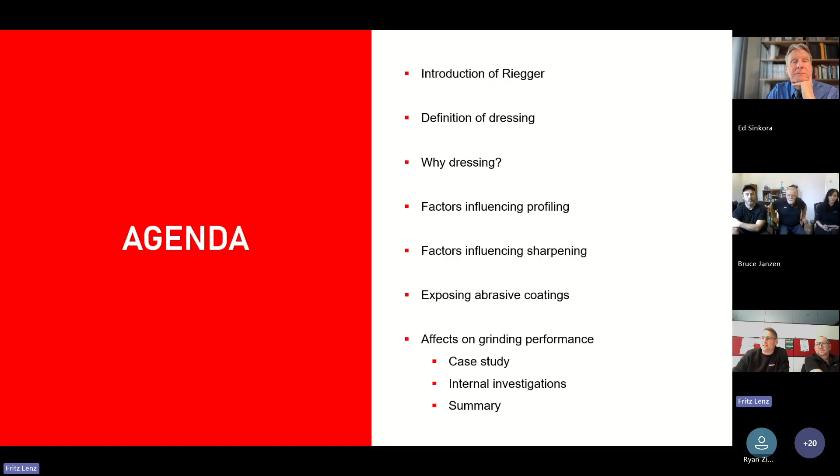Following our agenda for the next hour: first a small introduction of our company, Riegger, definition of dressing, why we have to dress, factors influencing profiling, factors influencing sharpening, exposing abrasive coatings, and lastly effects on grinding performance.

So we come to the company introduction. We are Riegger, now in the third generation. Our CEO is Konstantin Riegger. We were founded in 1967 by Wolfgang Riegger, his granddad. We have 60 employees. Our headquarter and main production is in south of Germany, in Affalterbach, close to Stuttgart, and we have a second small plant in Romania. We are focused and specialized in the production of diamond and CBN grinding tools, especially grinding wheels.

Our main fields of focus are tool manufacturing, like most of you, I guess, also machinery and plant engineering and contract manufacturing. We see ourselves as a partner, a technology partner, of our customers.

So we offer trainings and workshops here, or we also visit some of our customers to do workshops directly there. And we offer workshops over 2.5 days with several partners. Also part of our cooperation with our customers, we can offer application engineering and also a dressing service.

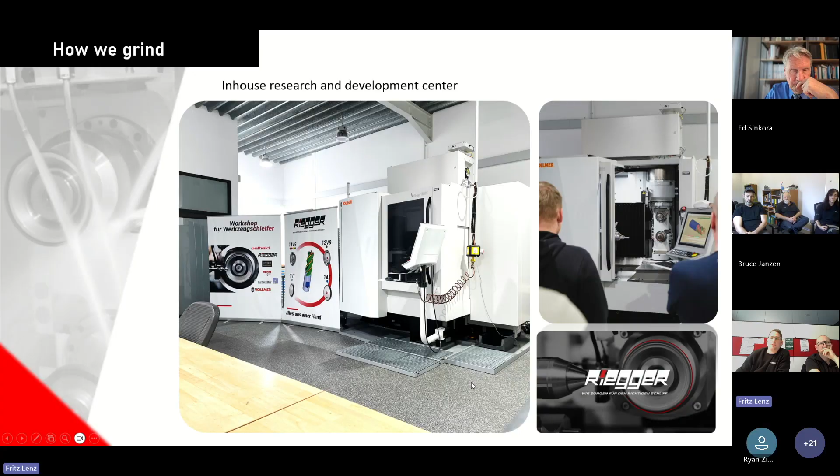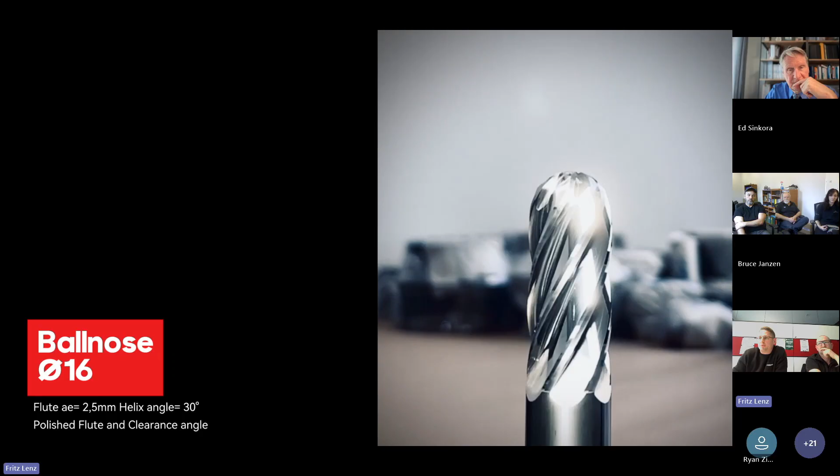Here, a quick example of what we grind - nothing new for you, I guess. Here, for example, just a ball nose cutter, diameter 16. That's our old standard fluting wheel, scope grind RMP3.

Now, brand new, developed in the last year, a new solution for fluting. As well for the flute, we have a scope grind finish to polish the flute at the end with a mirror shining surface quality.

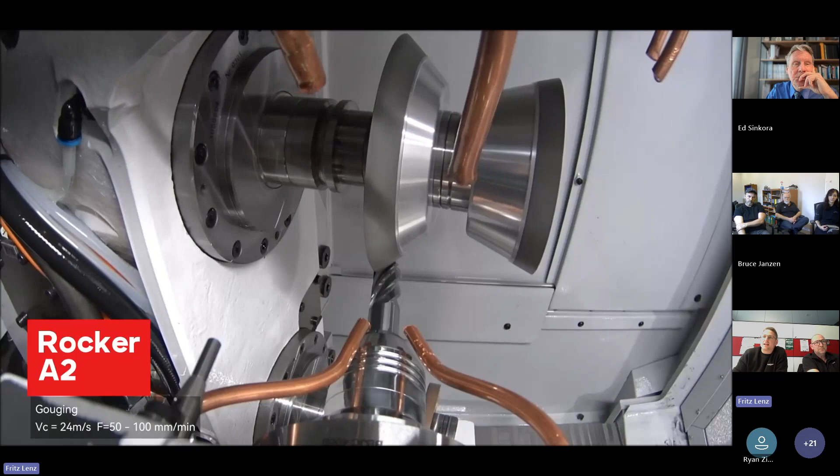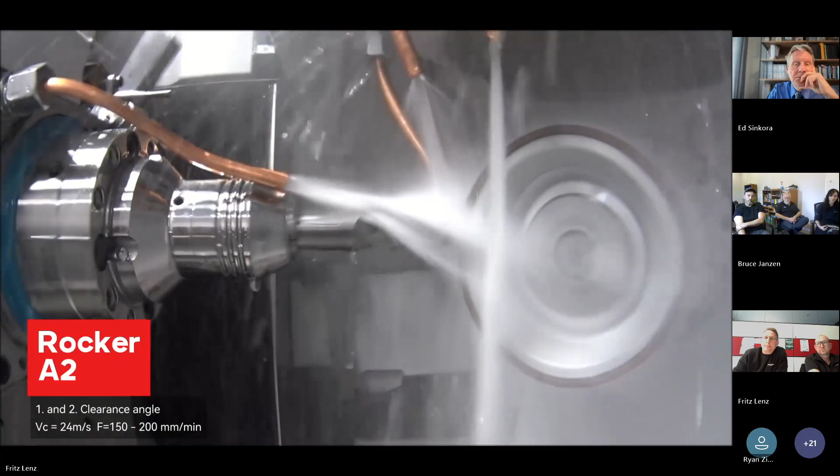And also for the cup wheels, we have some solutions - that's our solid solution for clearance angles, ODs and stuff like that. Also for gashing, that's the Rocker A2, a hybrid bond.

Also for the radius and face grinding, that's a good solution. And also for these geometry elements, we can use the scope grind finish for polishing these elements.

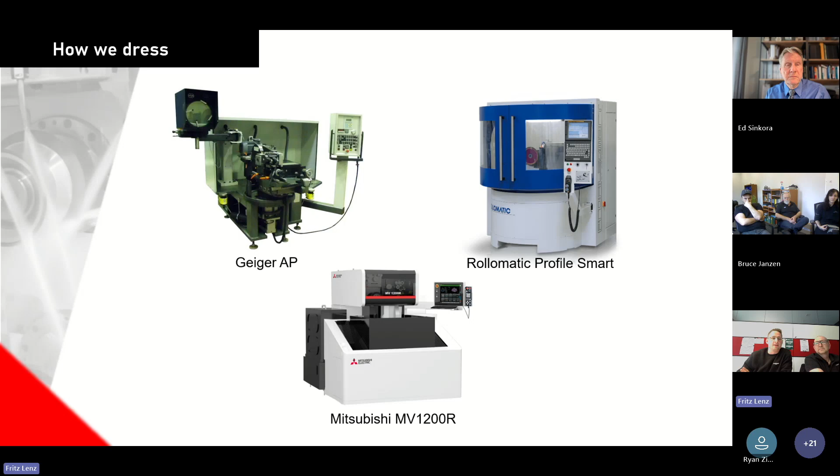So we come to the main topic for today: how we dress in our company. We have several opportunities and machines in our company. We have several Geiger APs, a manufacturer for dressing machines from Germany - real strong steel tanks, conventional dressing machines. Also we have Rollomatic Profile Smart, a CNC machine for dressing, and last but not least, we have the Mitsubishi MV1200R, so we have the possibility to dress via wire cutting. But today we focus on the conventional way of dressing.

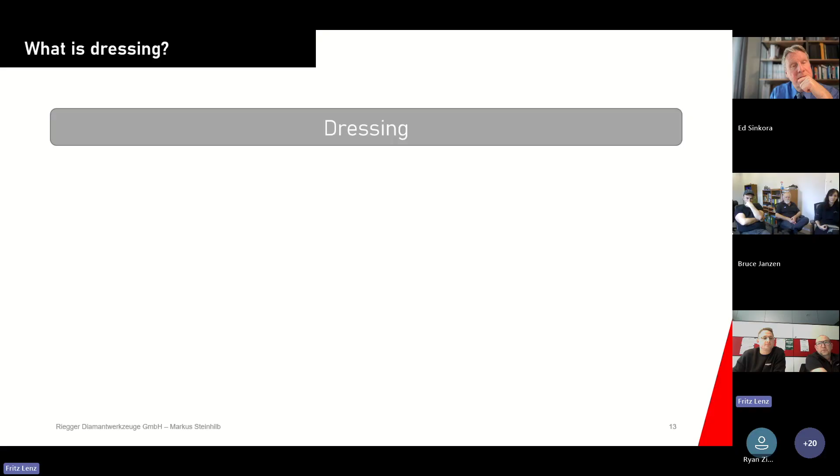Okay, hello and welcome from my side as well. Let's start with the actual topic: what is dressing? Dressing involves two work steps. The first one is profiling, the second one is sharpening.

This together is called dressing. During profiling, our goal is to change the geometry of the grinding wheel. We aim to establish the macro geometry and to improve radial runout and axial runout, and we can balance the grinding wheel a little bit by profiling.

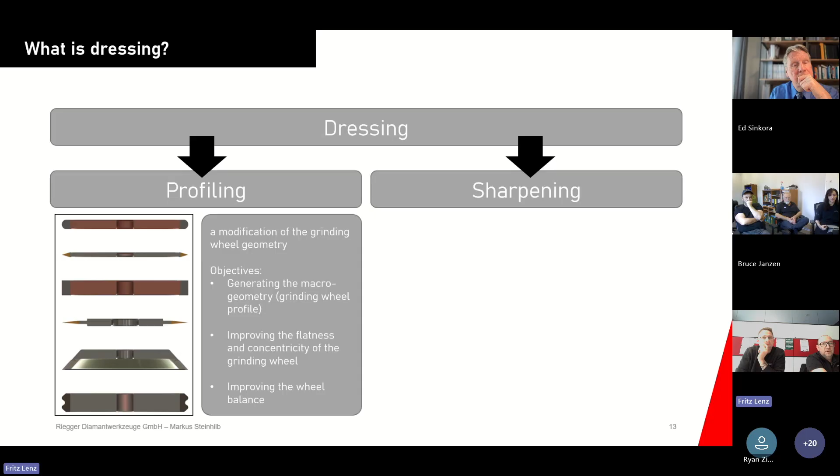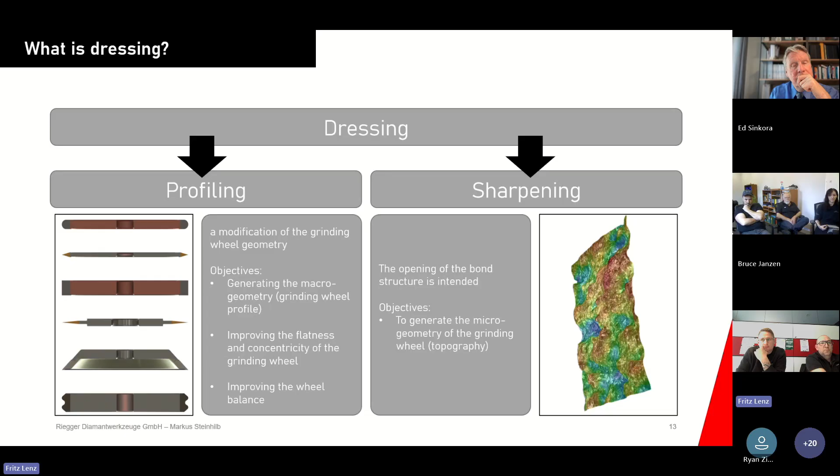In the sharpening step, the macro geometry remains unchanged. At this stage, the focus is exclusively on creating the micro topography - we just want to generate the tips of the diamonds outside the bond.

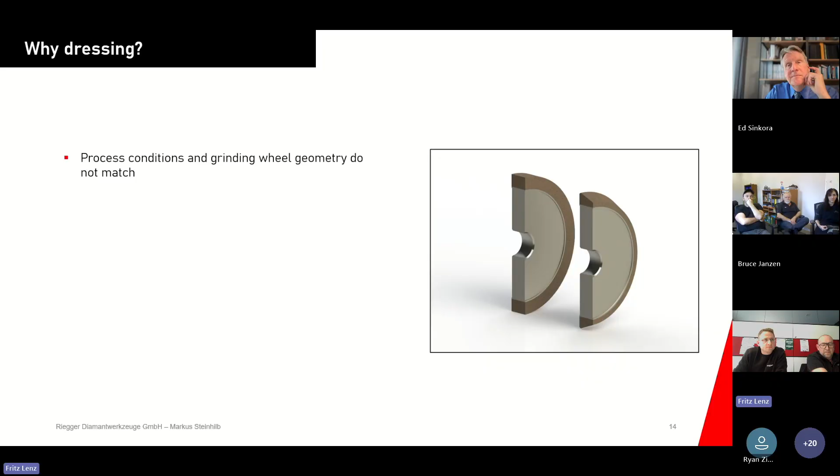Let's take a look at why we have to dress. The first reason is the process conditions and grinding wheel geometry does not match - like we need another shape or form of the grinding wheel, and you got it from your grinding wheel distributor as a wrong form. The concentricity and flatness accuracy are insufficient, or we have an imbalance at the grinding wheel.

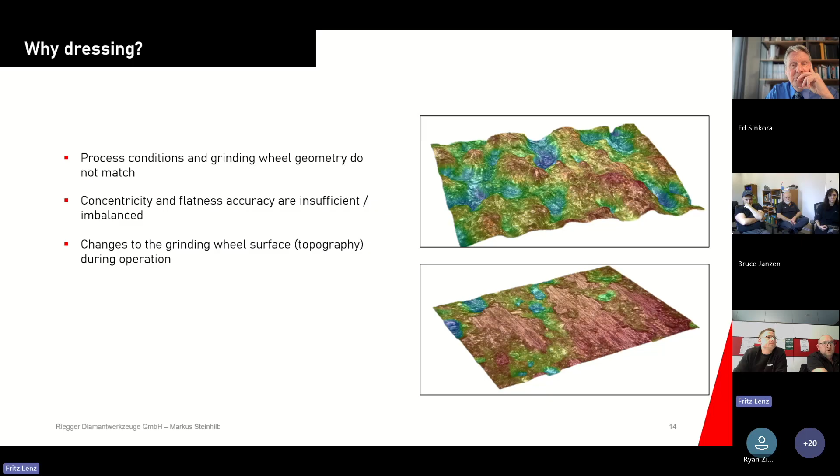We had changes at the grinding wheel surface, at the grinding wheel topography during the operation. We had a loss of form or a big wheel wear during the operation, or the grinding forces increase significantly.

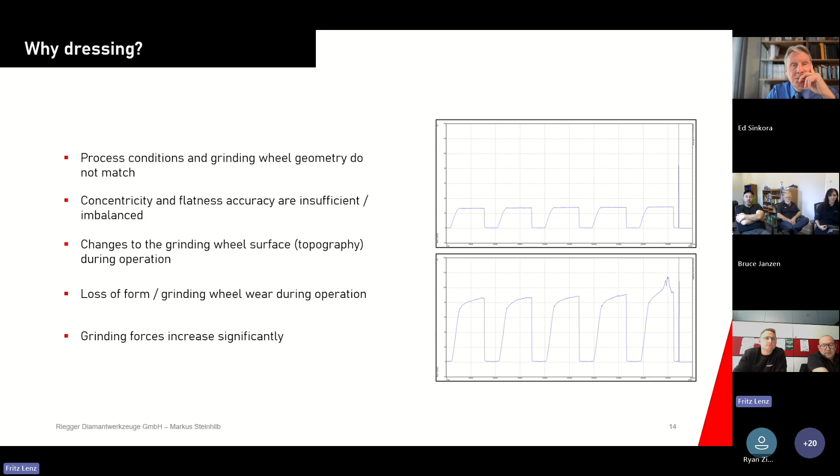Or redressed. The types of grinding wheel profiling.

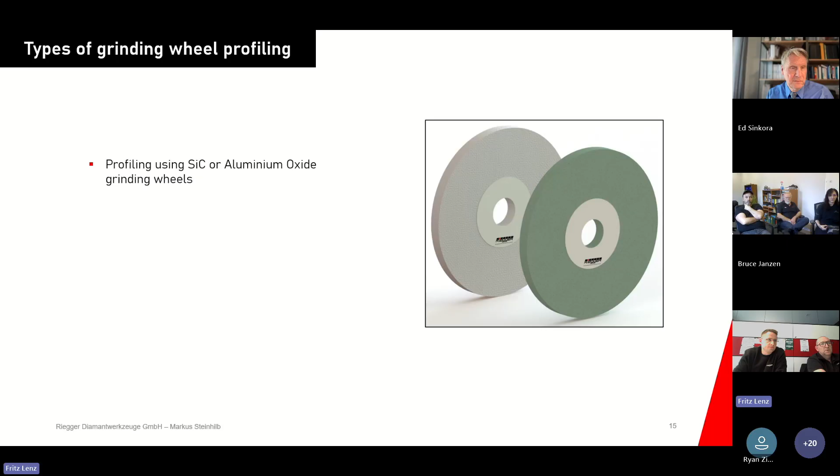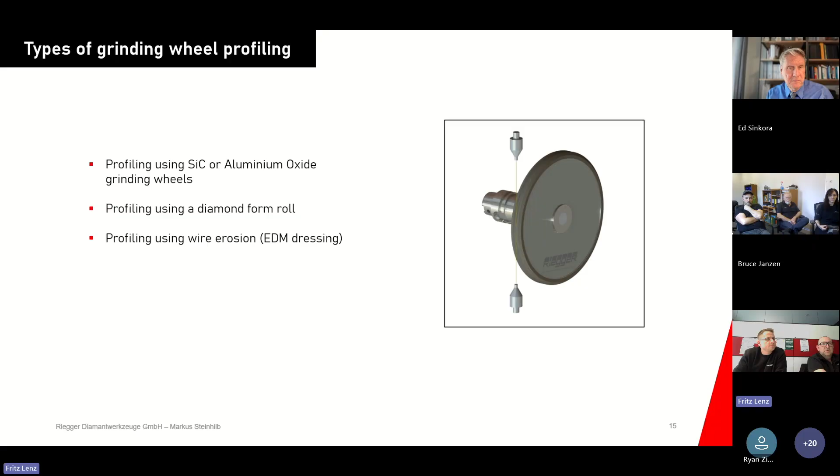Here I show you the most common dressing methods: profiling by using carborundum or aluminum oxide grinding wheels. We can profile by using a diamond form roll, by using wire erosion (EDM dressing), or with an electroplated form roll.

Now let's get into factors influencing profiling. First up, we've got the parameters. Are we dressing synchronous or asynchronous, clockwise or anti-clockwise? What cutting speed, feed rate, or depth of cut are we adjusting?

Next point is the in-feed strategy. Are we feeding in or outside the grinding layer? And another point is the cooling system.

So we can switch to the last point of this page: the specification of the grinding and dressing wheel. As I said, if I use corundum or silicium carbide, what grit size, hardness, or bonding system are we going with?

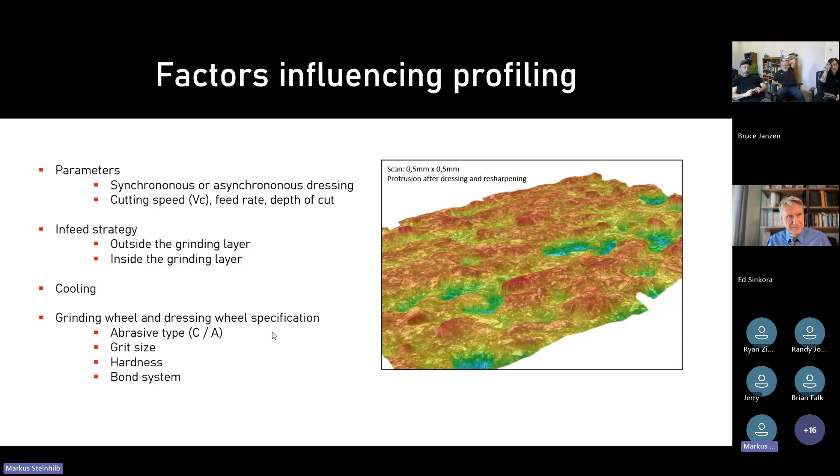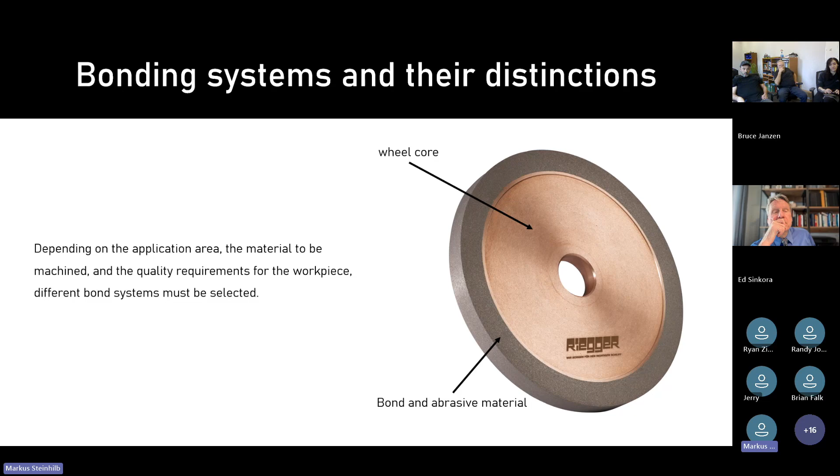A super-abrasive grinding wheel is composed of three fundamental elements: the base body, the bonding system, and the abrasive material like CBN or diamond. The selection in each case depends on factors such as the material to be machined and the specific grinding operation. The bond holds the abrasive grains as long as possible, but it must also wear so that new cutting edges are formed. The bonding system also influences how easy it is to dress the grinding wheel.

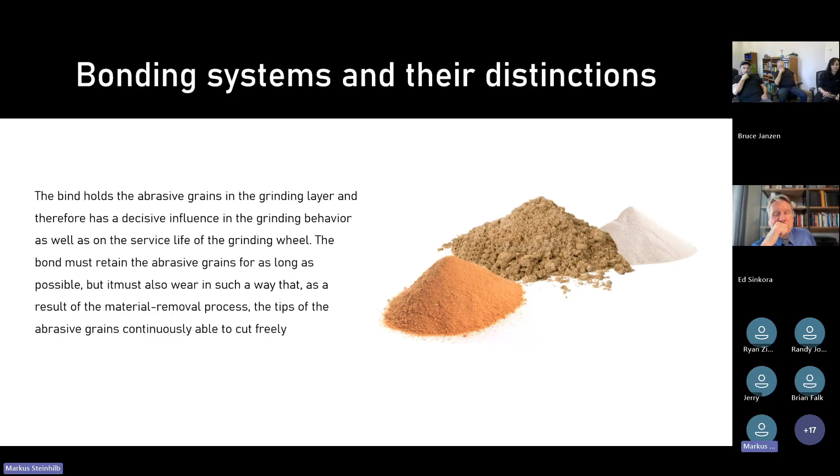Now let's move on to comparison of the bonding systems. Here we look at the different characteristics, mainly focusing on dressability. First, resin bonds. Resin bonds have a high removal rate, good cutting ability, and provide mostly smooth, cool grinding, but come with high wear. Classic resin bonds are mostly soft with good cutting performance and easy to dress.

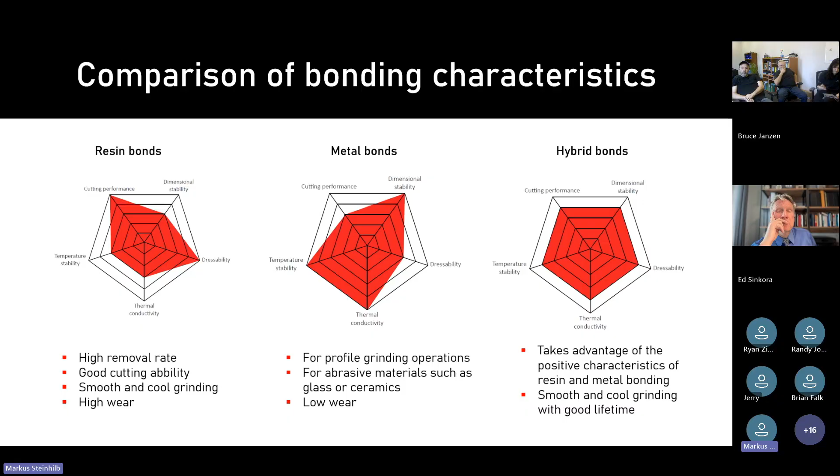On the other hand, we've got metal bonds with high hardness, good dimensional and temperature stability, and great thermal conductivity. These bonds are typically used for profile grinding operations and for abrasive materials such as glass or ceramics. Lastly, we've got hybrid bonds, which combine the advantages of both, giving smooth and cool grinding with good lifetime.

One important thing to add here is that each bond type can also be influenced in its properties by additional parameters such as fillers, pore formers, pressing force, and pressing temperature. Each individual parameter affects the wear behavior and grinding performance of the grinding wheel, which is why individual bonds can deviate from the characteristics listed before.

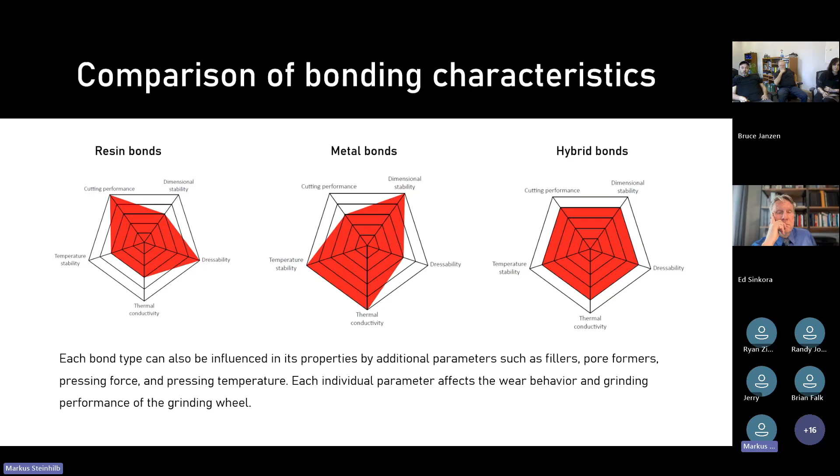Here we have a designation of a typical dressing wheel that we use at Riegger: C120 J7V36 S63. We will go through it character by character.

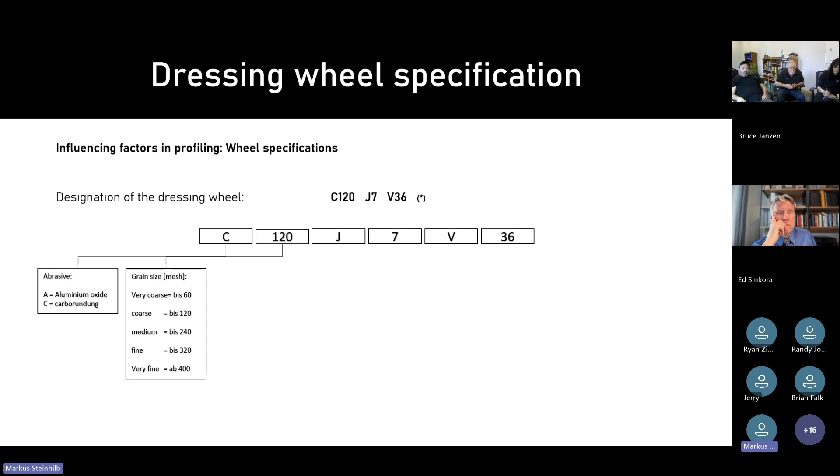The letters A or C mean that aluminium oxide or carborundum is being used at the dressing wheel. The number 120 is the grain size, from 60 (very coarse) to 400 and more (very fine). The letter J is the hardness of the bond, going from A to Z, extreme soft to extremely hard.

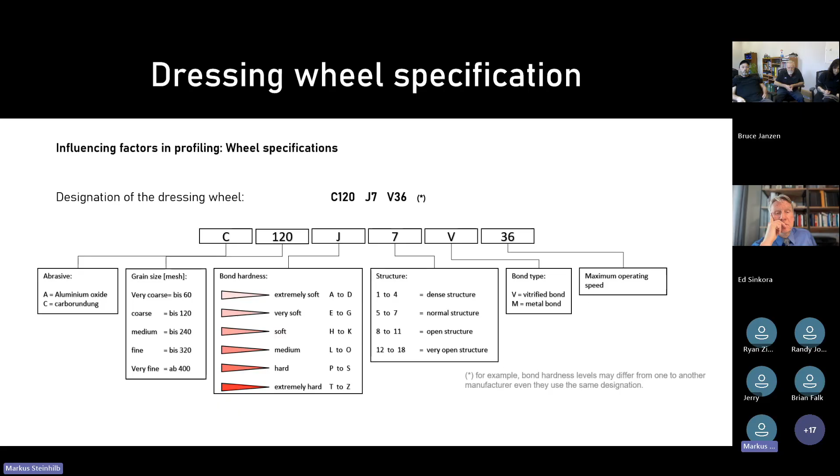The next number describes the bond structure, from 1 (very dense) to 18 (very open). And the last letter and number describe the type of the bond and the maximum operation speed.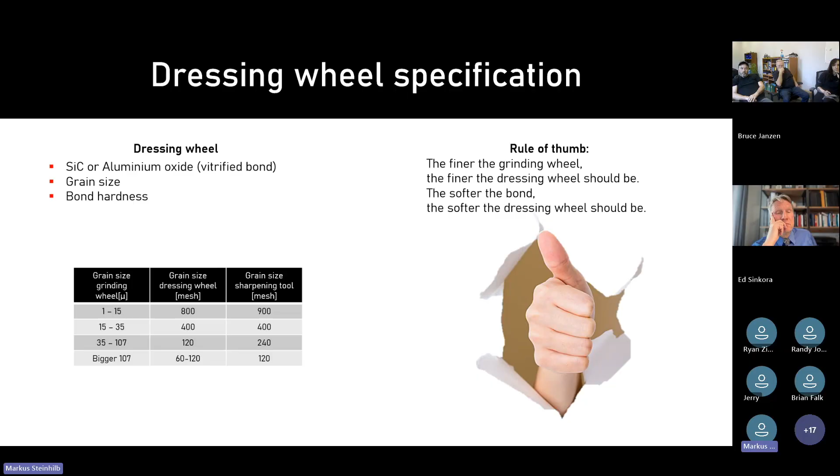Also, the rotational direction affects the performance of profiling. By choosing a synchronous direction, the effective cutting force is significantly higher, and so we achieve a sharp grinding wheel, a rougher workpiece surface, and low grinding forces.

By turning around the rotational direction into asynchronous, we generate a smoother grinding wheel, a finer workpiece surface, and higher grinding forces.

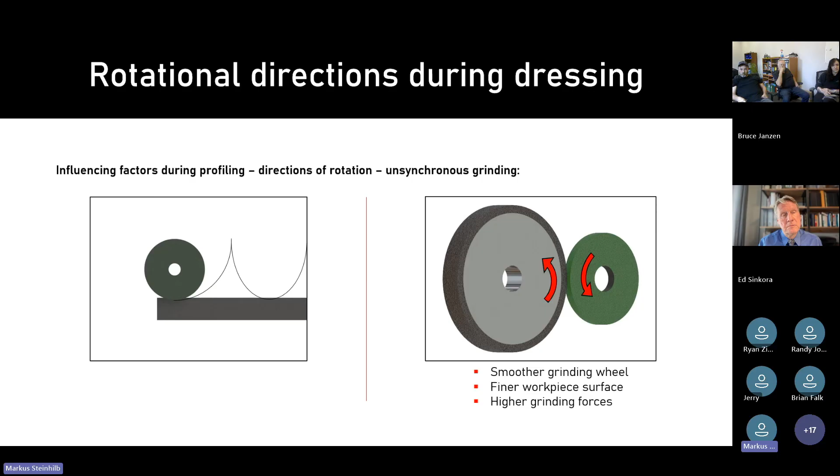Another point is the parameters of the wheels: the chosen cutting speed and the selected RPM. At Riegger, we always recommend paying attention to the rotational speeds and suggest a speed ratio of 1:3.

So the dressing wheel should always run 3 times faster than the grinding wheel. For example, when you choose 500 RPM for the grinding wheel, you have to adjust to 1500 RPM for the dressing wheel.

If this ratio cannot be achieved, because it's not possible from a machine standpoint or something like that, the diamond or CBN grinding wheel must always run significantly slower.

Another point: to prevent the spindles from starting to swing up or vibrate, please don't choose even speeds.

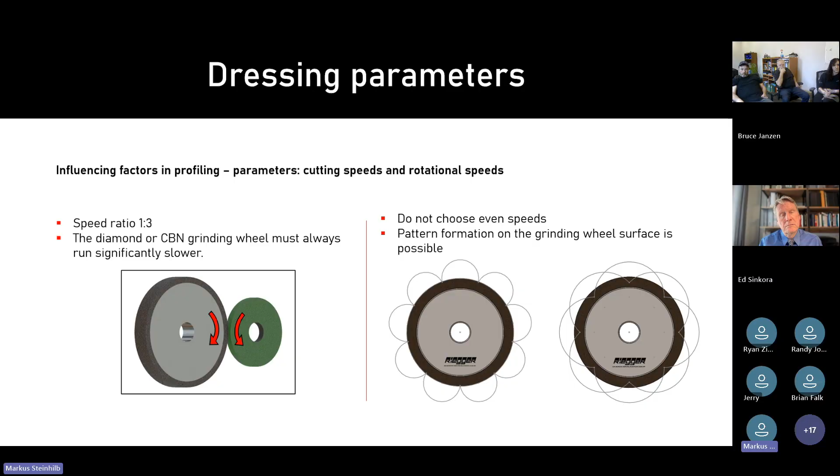What about the cross feed and the in-feed? The cross feed depends on different factors, such as the width of the grinding wheel and the geometry being dressed. For example, when dressing manually, a lower cross feed is used for radius to avoid creating facets. Typically, the cross feed rate is around 700 to 1000 millimeters per minute for straight areas and 400 to 700 millimeters for radius.

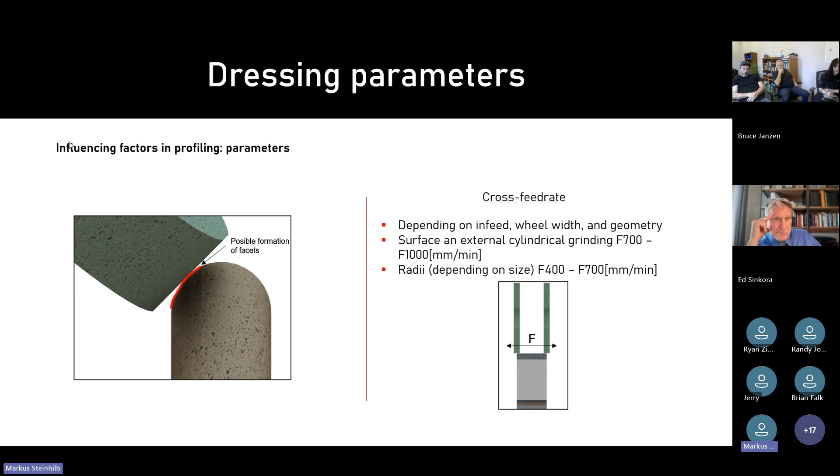The in-feed strategy shows that less wear and sharper grinding wheel edges are achieved when the in-feed is made within the grinding layer. If the in-feed is applied outside, chips can occur and the wheel can become convex. You see it here on the right side of the foil. The wider the grinding wheel, the stronger the effect.

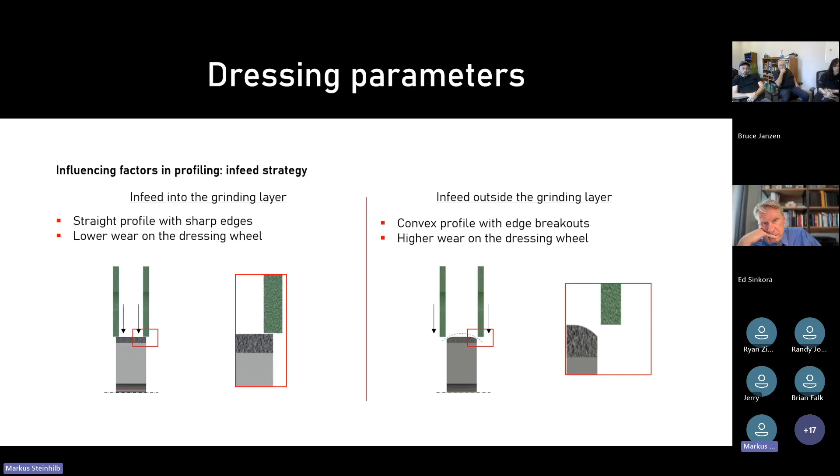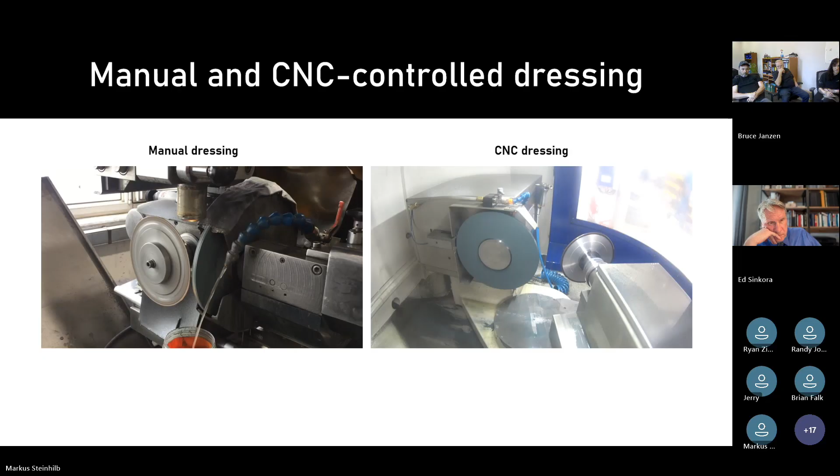Important for that is different geometries may require different strategies. In the following videos, there are some examples of the dressing process as we do it at Riegger.

Here you can focus on the cooling, and here you see how we cool in an indirect way. Here you see the work of our CNC dressing machine from Rollomatic, the Profile Smart.

On the CNC machine, you see also that the dressing wheel never leaves the dressed wheel, the grinding wheel. We are every time in touch with the grinding wheel.

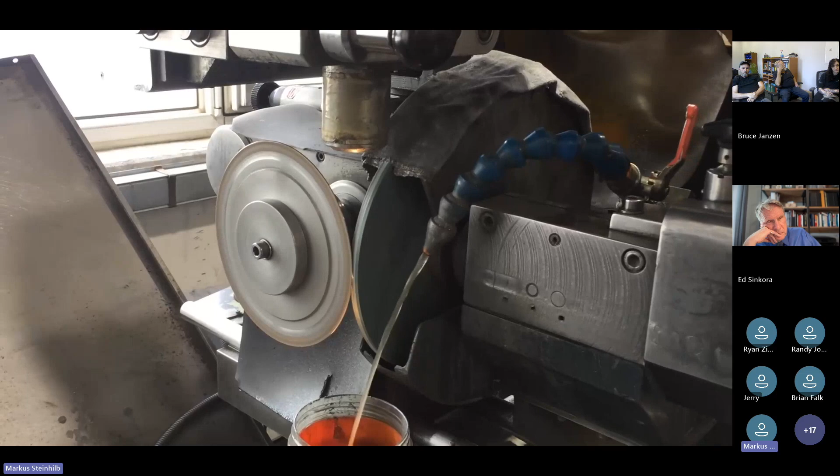Now I have a look at the manual, conventional Geiger machine. And here you see the cooling as well. So we don't go with full pressure in the dressing process. We do it also in an indirect way.

The next one is the dressing video from our 5-axis tool grinding machine, the Vollmer 360S. That's an example of how you can dress properly on this CNC grinding machine.

Let's take a look at the sharpening process. There are normally two types of sharpening: we can sharpen manually or by machine. The advantages of machine sharpening are a constant force to the grinding wheel, a constant infeed to the grinding wheel, and this leads to a consistent result. Manual sharpening, on the other hand, is strongly influenced by the individual operator, the individual guy in front of the machine.

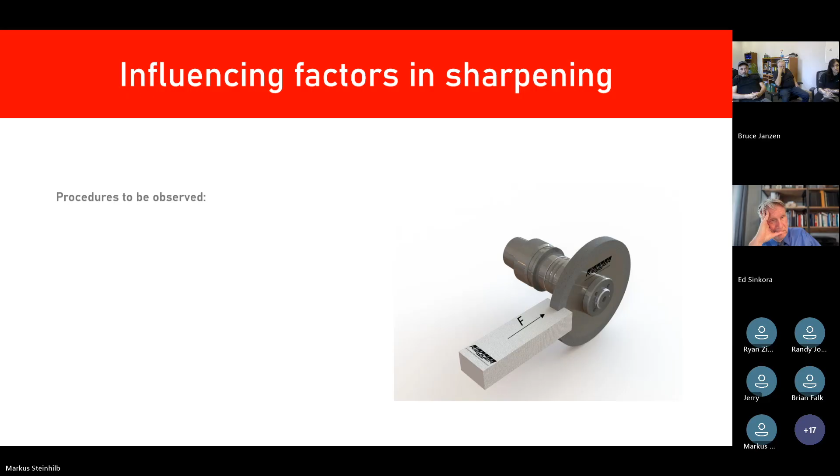But no matter if the grinding wheel is sharpened by a machine or by hand, we have to look at what is important. The direction of rotation during grinding must correspond with the direction of rotation during the sharpening. The sharpening stone should be soaked in oil or emulsion to get, by the sharpening process, a slurry during sharpening. Once the final depth has been reached, a short dwell time should be applied to allow the grinding slurry to take effect.

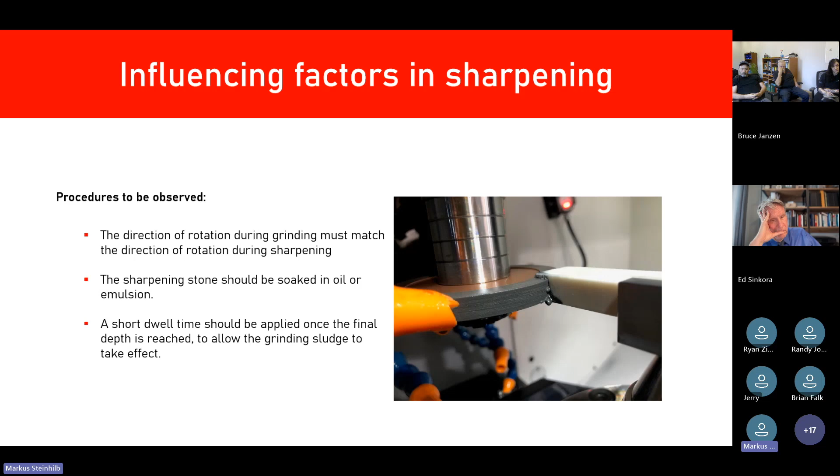Here you see a bigger picture about the slurry. What I mean by this slurry is the diamond powder mixed with a little bit of the bond, and a little bit of the corundum or the aluminium oxide, and this is a very important thing for sharpening.

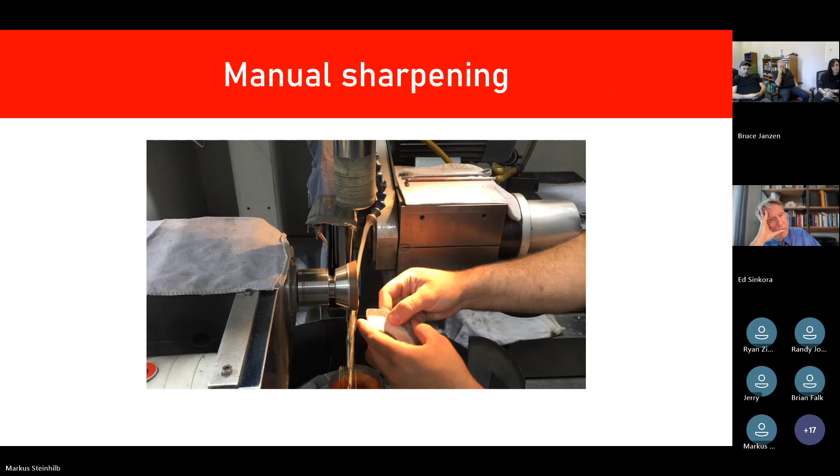We also have two videos for the sharpening. The first one shows the manual sharpening, and here you see it's just done by hand, on each side with different forces in different directions and so on.

Another important topic is exposing grinding wheel surfaces, which means turning back the body material so the abrasive layer can be used again.

On the following page, we see some negative examples. On the left side, the broken, manually exposed one, and on the right side, this customer turned too deeply, so there was no contact area anymore, and the grinding rim broke out.

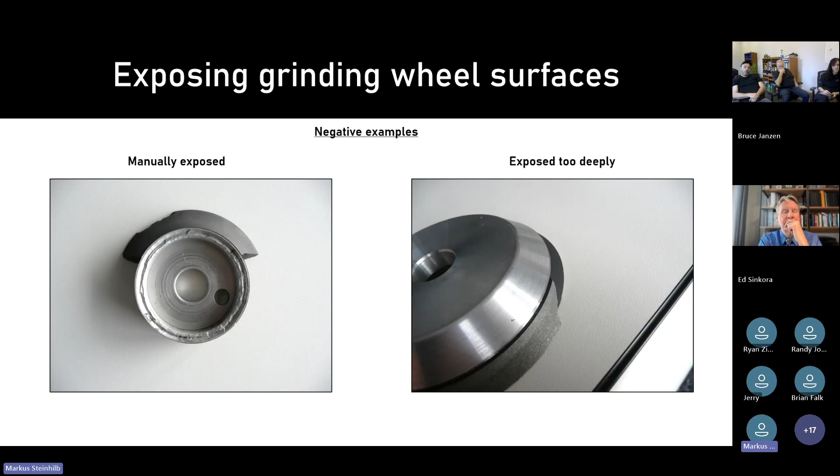That brings us to the initial question: when should a grinding wheel surface be exposed? When the abrasive layer and the core body have reached the same height, like here in the picture, or when the body material interferes with the grinding path.

So next question is, how should a grinding wheel surface be exposed? The most important thing is to use proper machines and tools, not by hand, ideally on a lathe with a suitable turning tool. And another important thing is, if this isn't done on the adapter, the wheel should be balanced again.

Next question is, how much should a grinding wheel surface be exposed? In summary, as little as possible, because sometimes the body additionally serves to provide support and absorb forces during the grinding process. But always pay attention that the abrasive layer is never touched under any circumstances, because even small micro cracks on the rim or on the bonding can cause damage and a breakage of the layer or the rim from the grinding wheel.

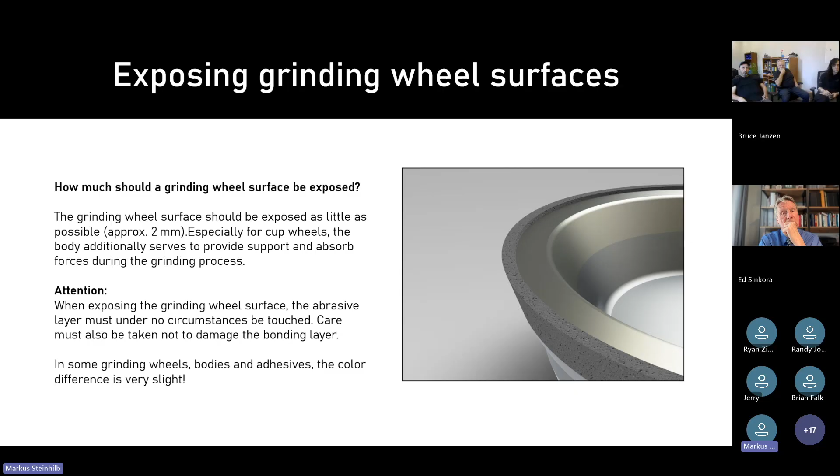See how our dressing process is affected. We carried out several tests that we would like to present to you. We have done 4 tests. The first test is a correctly dressed grinding wheel with sharpening. The second test is a correctly dressed grinding wheel without the sharpening. Then we had an incorrect dress. We used a much harder dressing wheel for this dressing process, but we sharpened it. And test 4 is incorrectly dressed without sharpening.

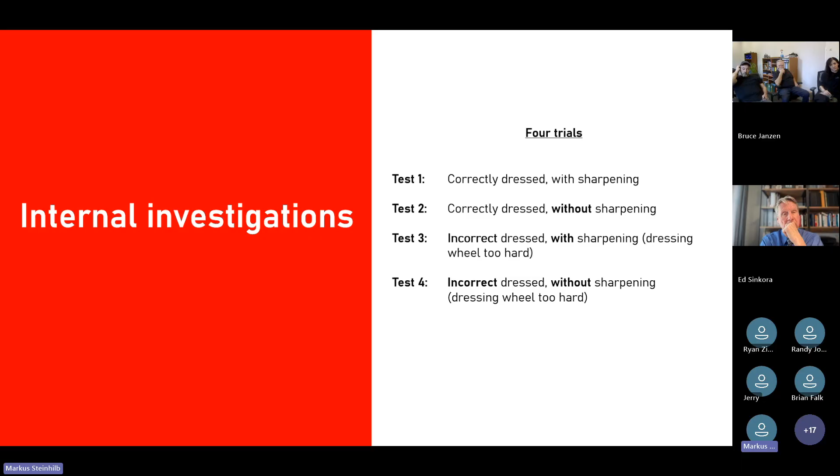The procedure was always the same. Only the dressing and the sharpening were different in these tests. We always used the same grinding wheel and ran the same parameters. The grinding wheel was a 1A1 with a diameter of 100 millimeters, a width of 10 millimeters, and a grit size of D54 in the RMP3 bond. We set a depth of 4.5 millimeters and ground with a feed rate of 100 millimeters per minute. Using these parameters, 5 grooves were ground into each carbide blank with a diameter of 12.

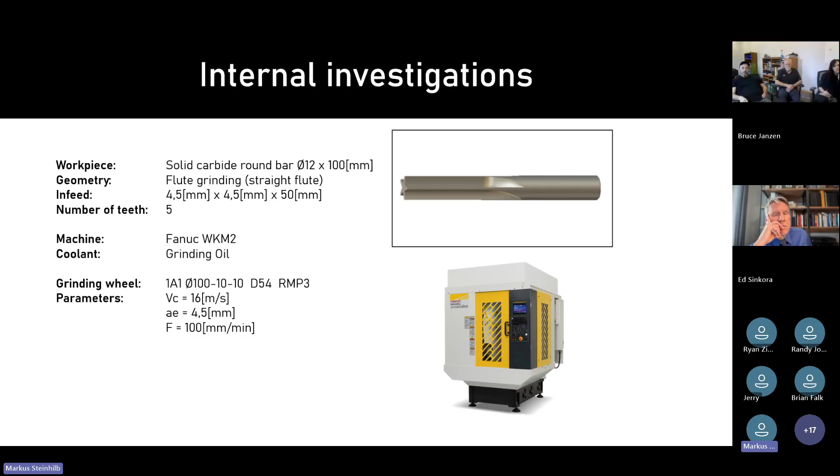So we follow the first trial, test 1, properly dressed, how it should be. We use the machine you saw in the videos before, the machine from Rollomatic, the Profile Smart. We choose the correct wheel: silicon carbide, grit size 120, porosity and hardness J7, vitrified. We choose the dressing wheel speed 1500 RPM. As I said before, we don't choose this value, but just for notification reasons, we note it down like that. And we choose the grinding wheel speed of 500 RPM.

We choose the cutting depth per pass of 0.07 millimeters. The rotational direction we chose was synchronous. Our cooling, as you saw before, was emulsion. Also, at the end, we sharpened by hand with a corundum stone with a grit size of 240. We choose the same speed of the grinding wheel, 500 RPM. Because it was by hand, the cutting depth was approximately 5 millimeters. Here we choose both rotational directions, synchronous and asynchronous, to make it really sharp.

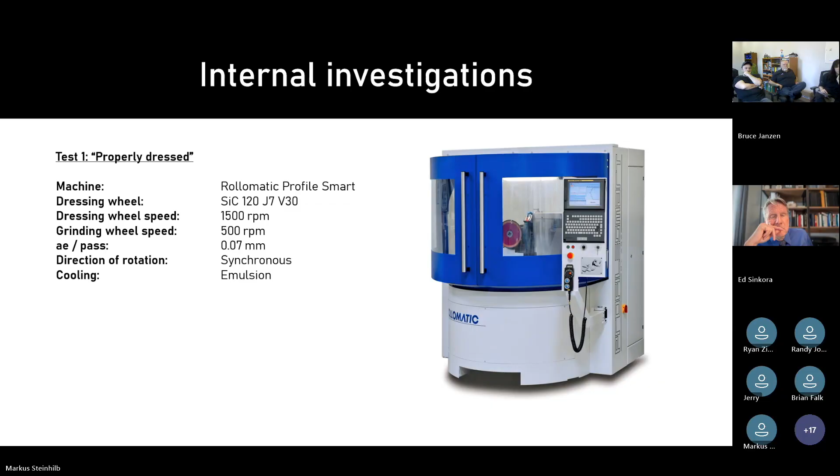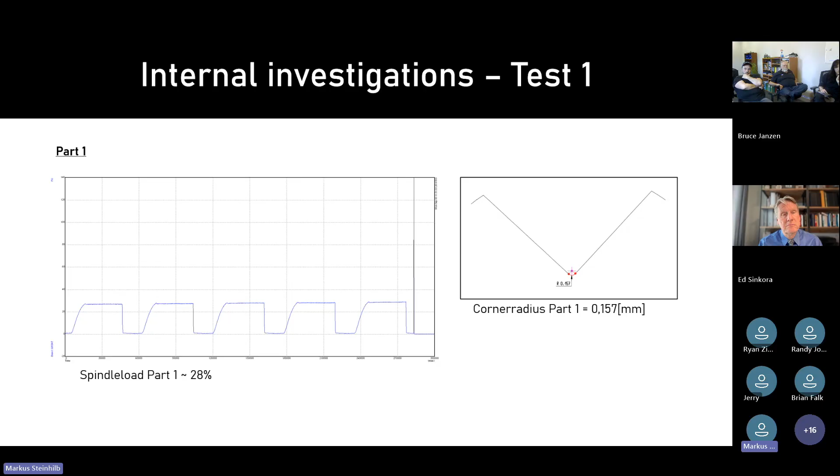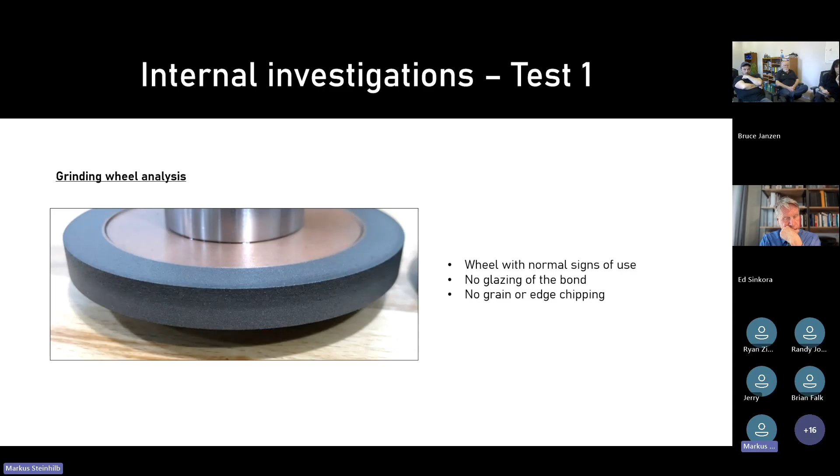At part 1, as you can see, the spindle load was very consistent, very moderate, and relatively low. The value was 28%, which is very good for this application on this machine. After 20 parts, we still have a very consistent spindle load, very moderate, but increased by 20% to 48%. After that, we took a look at the grinding wheel, and as you can see, we see some normal signs of use, no glazing of the bond, and no grain or edge chipping, no damage. So everything is normal and in good condition.

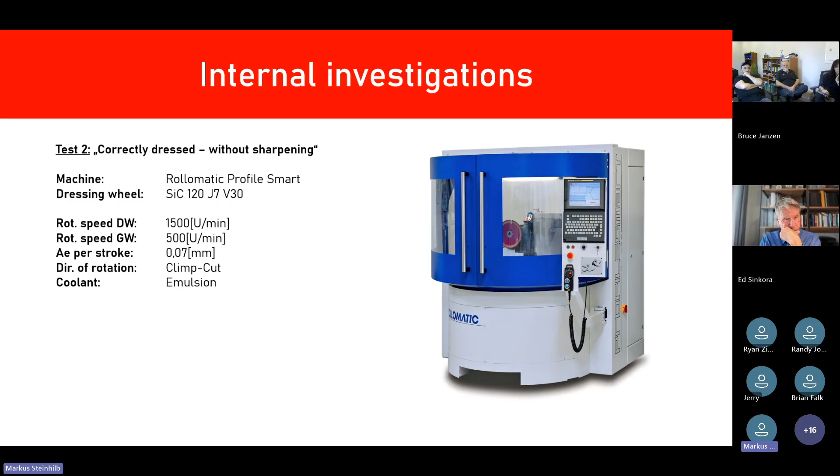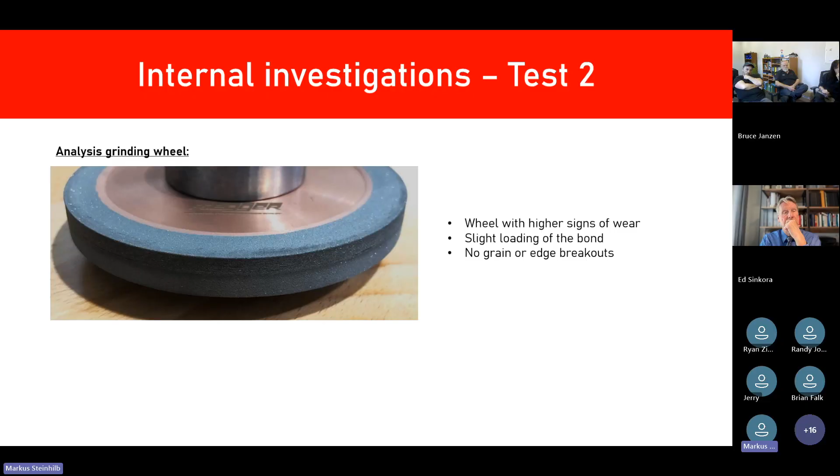The next experiment, the third test, was dressed incorrectly, with the wrong wheel selection. Here we used the same machine, same parameters, but a different dressing wheel specification. We chose silicon carbide with grit 180 and hardness and porosity of O9. And again, also hand sharpened as before in a proper way.

I'm sorry, Markus, refresh my memory. Why is that the wrong dressing wheel? That's just the wrong dressing wheel for the grinding wheel we used. We never can say. No, I understand that. I'm sure some of my colleagues have my elderly memory here. I'm forgetting what the parameters of the wheel were that would make this an inappropriate dressing wheel.

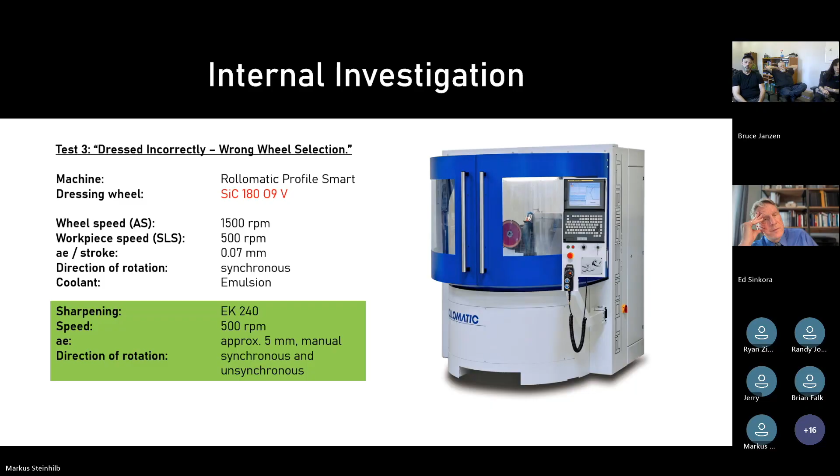It was a hybrid bond with D54. And for this we did trials, and the proper one was the silicon carbide one with grit size 120 J7. Right now we did the same trial with grit size 180 and O9. And then we analyzed the spindle power and the influences on this process.

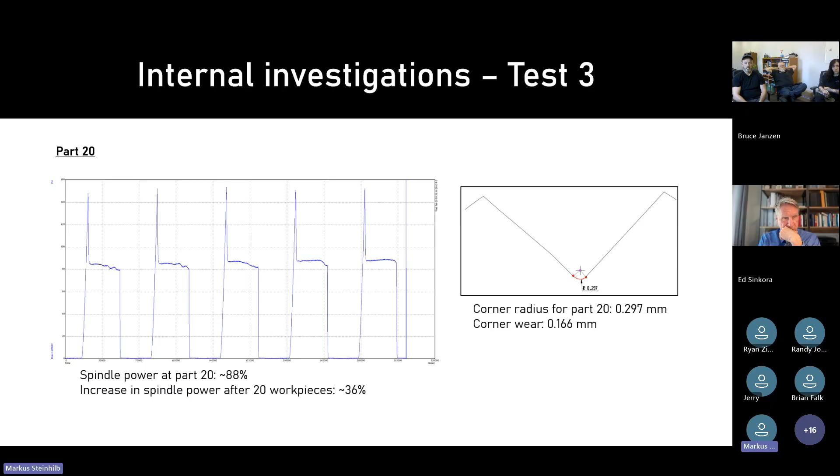Here you can see it at part 1. We started with a stable spindle load, but we started at 52%. But the graph you see is already uneven and not really consistent. And the real effect you see after 20 parts. After 20 parts, we have reached a high, inconsistent spindle load of 88%. Especially when we hit the workpiece at the beginning, the spindle load rises extremely, and we reached a very high peak.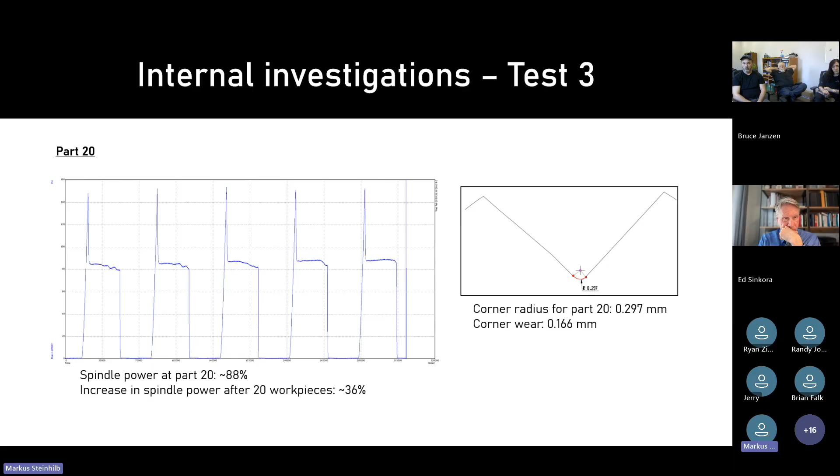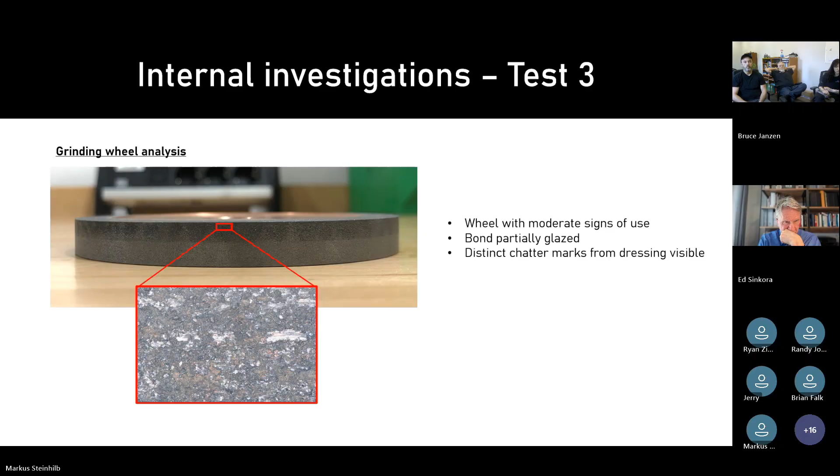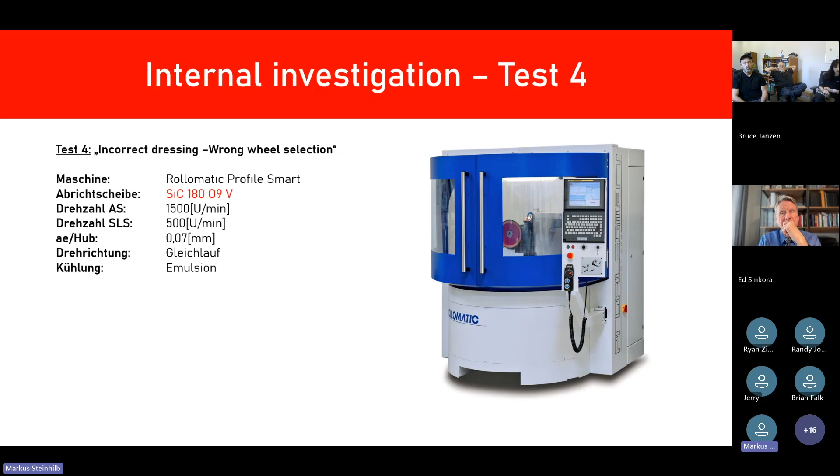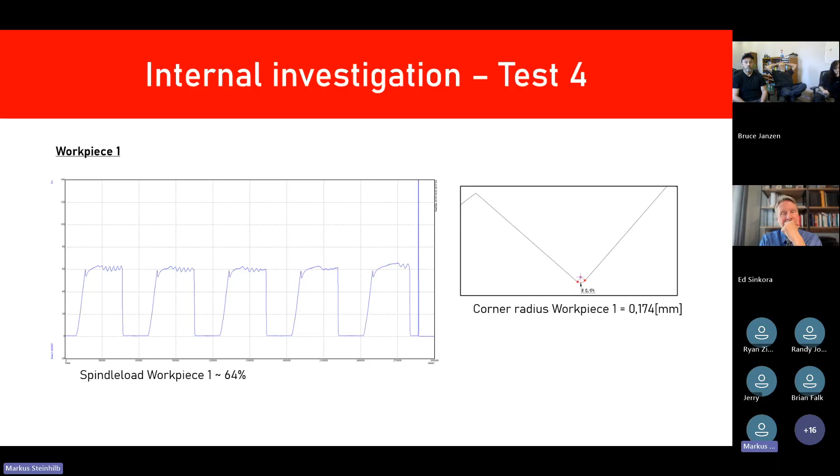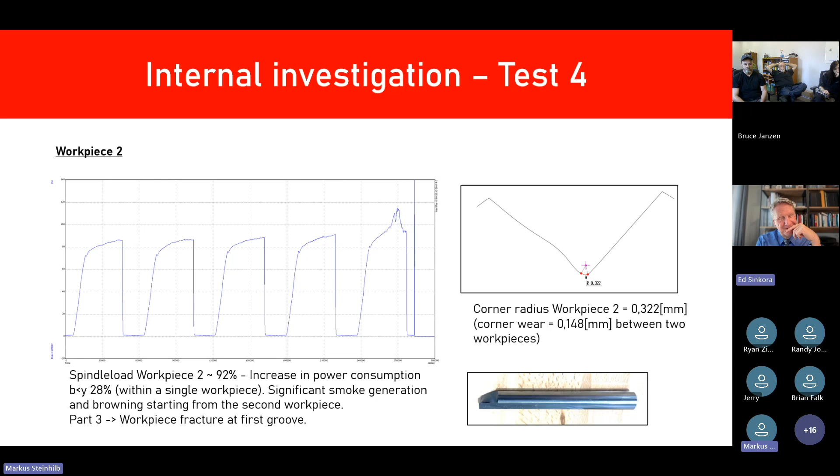The last test we did was set up like the third test before, but here also without the sharpening. I can say right from the start that we did not complete all 20 workpieces, because we already started at 64% spindle load on the first workpiece, and on the second workpiece, the spindle load had already reached 92%. During the third workpiece, the workpiece broke after the first groove. You see it in the picture on the right.

When we inspected the grinding wheel, we saw that it showed strong wear. The bond at the wheel edge was fully loaded and glazed, and clear edge chipping was visible. In addition, changes were seen in the outer area of the workpiece.

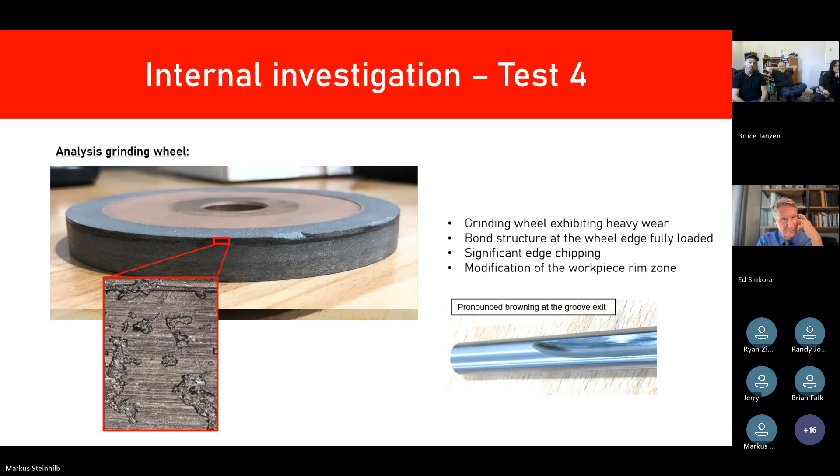So when we summarize this and compare the spindle loads, we see clear differences between the results, and we see clearly the effects. Improper dressing can cause differences in spindle load of 40% or more. Even small differences can have a big impact in terms of the spindle load, the spindle life, the wheel life, or production volume.

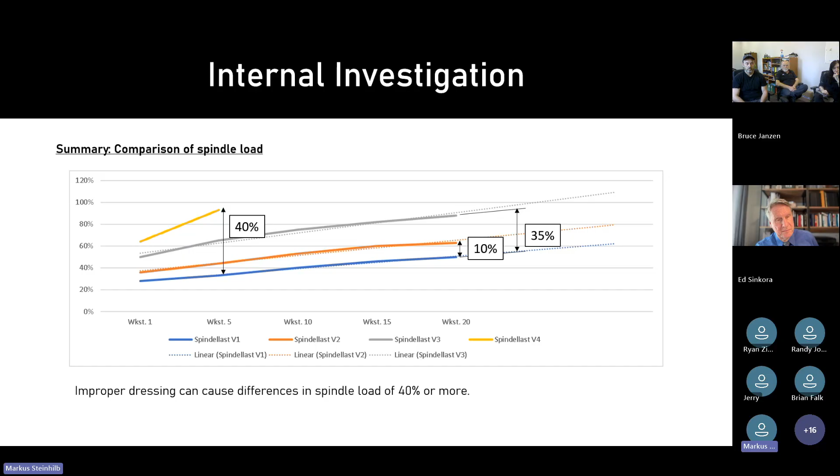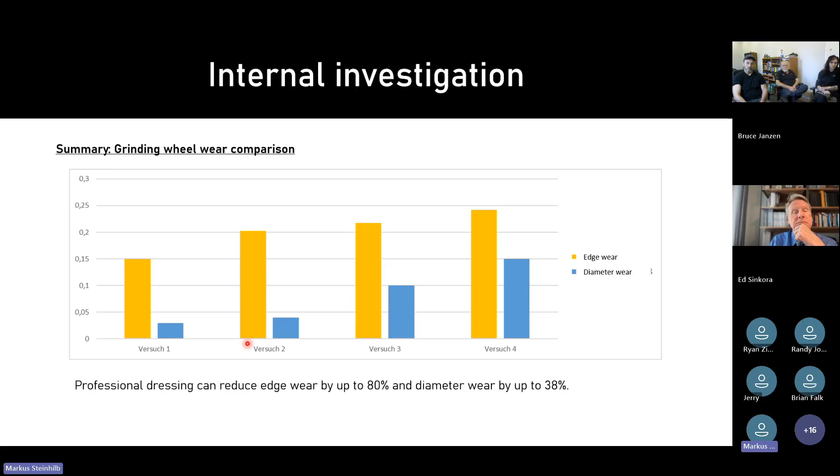So at the end, let's summarize the most important points about dressing. First, use a properly maintained dressing machine, with no worn or loose spindles or axes. Use a dressing grinding wheel matched to the grit size and bond system, and sharpening stones matched to the grit size and bond system. We have to choose the correctly selected parameters, like cutting speed, feed rate, and depth of cut.

Preferably cool with oil or emulsion, not with full pressure. We should do it like you saw in the video, in an indirect way, but it's important to cool with oil or emulsion. And at the end, we can repeat Markus' words from before: proper dressing can significantly extend the dressing interval, and workpiece quality and grinding performance are improved, while grinding wheel wear is reduced. As a result, in the end, we significantly increase productivity.

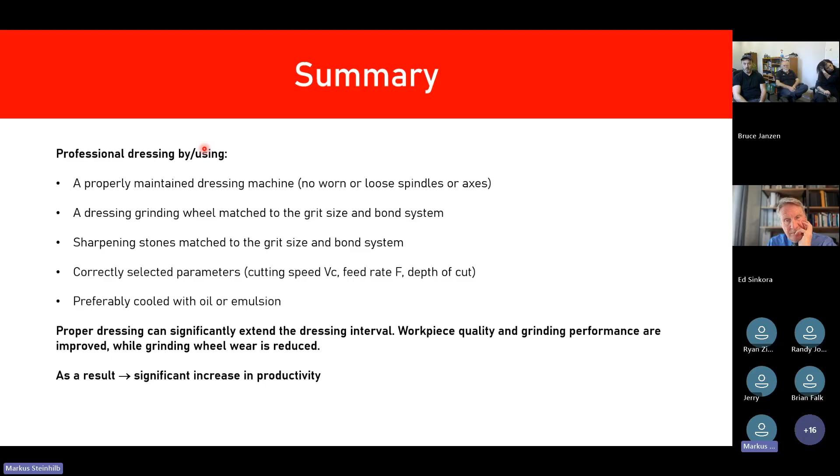So we now try to speed these things up to keep the time. And now I pass it back to Ed again.

Thanks very much, you covered a couple of key points really quickly. We've already got a couple of questions that I think are going to pull us back into some of it. You mentioned balancing quickly just a few moments ago, so how would you balance your wheels in general, or what do you recommend?

We balance it with a balancing machine. We have a special balancing machine from, maybe you know the company Haimer from Germany. Yeah, they're my competitor. I've said nothing, then it's a nice machine, another nice one. We also have the NPM. Oh, okay, maybe you know that better. That's a better answer. Okay, we have both of them.

Now, as the final step in our production process, every wheel that gets shipped to our customer is balanced on this balancing, or special balancing, machine.

And you mentioned earlier how if you have to turn down the body, you would have to rebalance. I guess broadly speaking, is that the only time you think it's necessary given the quality of your wheels, or would you go beyond that? It's necessary to balance, you mentioned earlier, if you have to turn down the body on the cup wheel, let's say, because the bond has now reached the level of the body, so now you have to turn it down. You mentioned that's a point at which you should balance.

Because of that slurry, it's important that the sharpening stone is soaked. In this slurry there is diamond powder, rests of the sharpening stone, and rests of the bonding system.

So otherwise you'd just be pushing the diamond back into the wheel, is that what you're saying? Yes, that's right. And you also push the corundum into the pores of the bond system, so you glaze it a little bit and smooth the surface of the grinding wheel. So with the soaked sharpening stick, you get a more open porosity of the bonding surface. It's to reset the binding system.